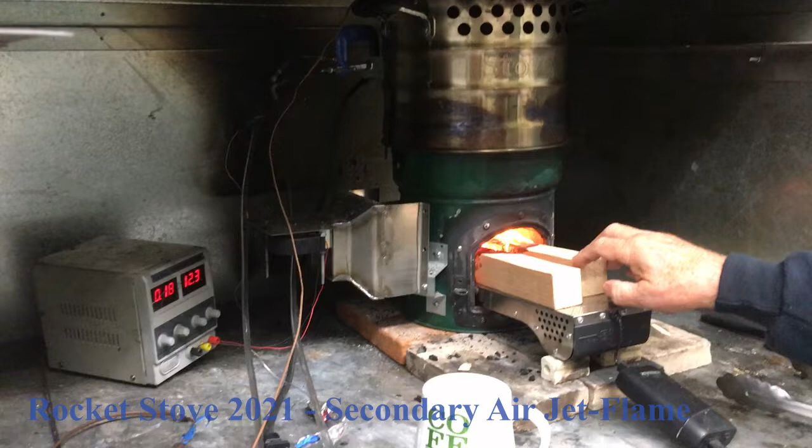We have the jet flame and we're pushing in sticks of Douglas fir very carefully, and we have a secondary air setup on the left. It's a stainless steel box made by Global Health Labs, a subsidiary of the Gates Foundation. We are controlling the fan speed of that secondary air, you can see the 12.3 volts, that's how we control it. Right now with the jet flame, we control the fan speed and we're holding that constant at 5 volts out of that USB.

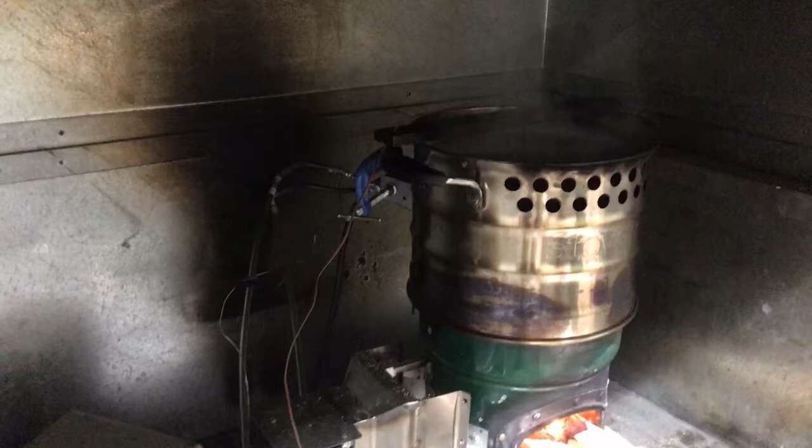Something you've never seen here at Aprovecho: we have the super pot fitted with an oxygen sensor, which is this black connector, and also fitted with a sensor to measure the velocity of the exhaust gases, those clear tubes. Then there's a temperature sensor inside that skirt in the back, they're all in the back. That helps measure velocity, but it also just gives us temperature. As usual, we have temperature in the pot.

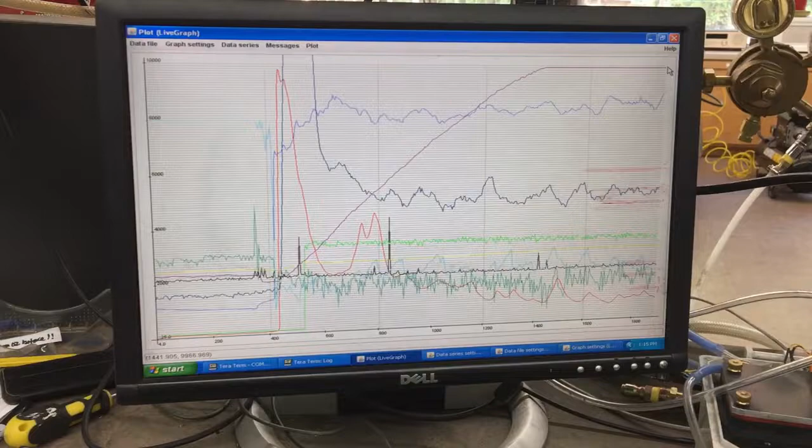Now we can go over and see the output from the LEMS. We've got a lot of lines happening right now. On the bottom we have a red line, that's the CO. Then we have this dark green line, that's an indication of velocity, it's inverse right now so lower is higher velocity. Then we have this light blue line, that's the oxygen in the skirt, going up and down each time we push a stick in and things happen. Then we have the black line, which is particulate matter, using our old LiveGraph program, and we have the sensitivity up very high so we can see if there are any problems with this stove.

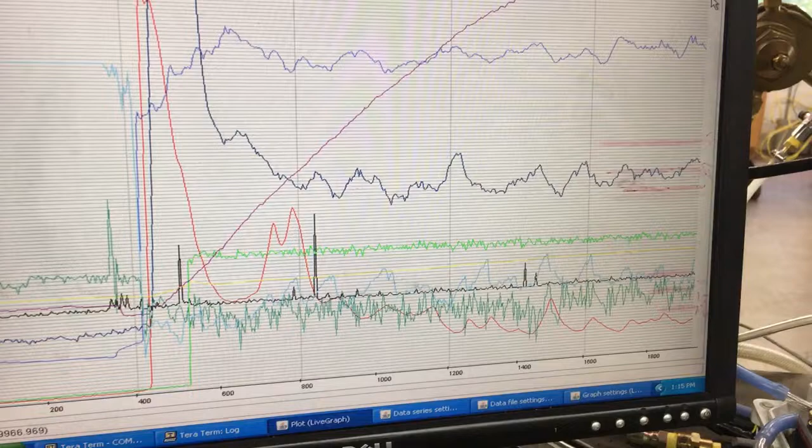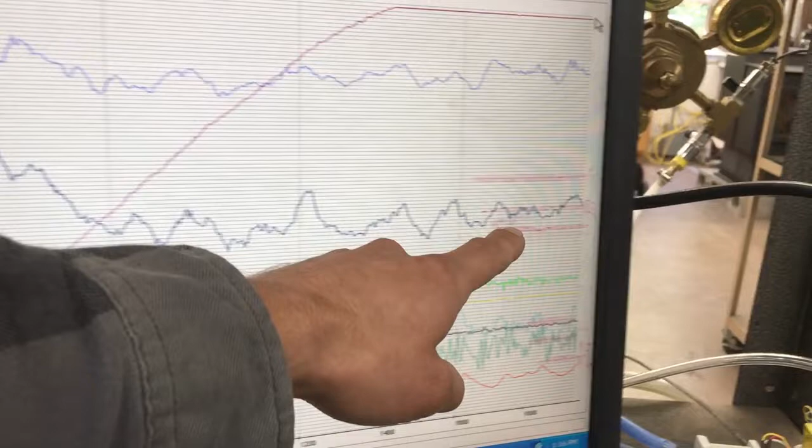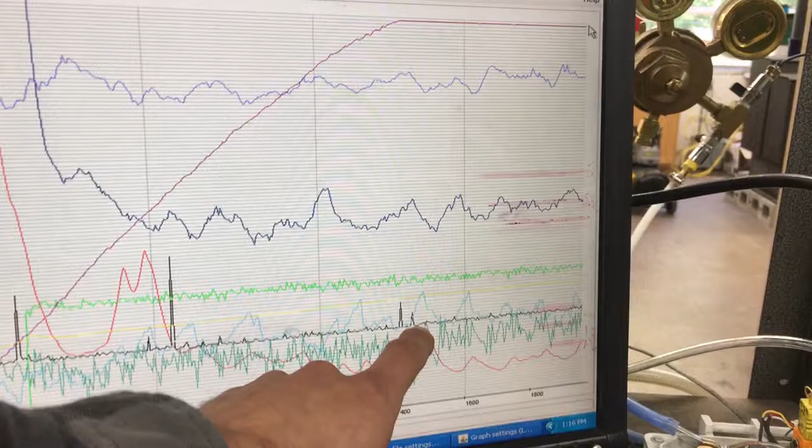This is really nice: then we have the CO2, which is a proxy for firepower. We've taken a China marker and drawn right on this old screen, and we're trying to keep the CO2 within those lines, because we know firepower and CO2 heavily influence the particulate matter. So we're trying really hard to control that independent variable, our main independent variable in this test series. Then we have the temperature in the skirt and the water temperature.

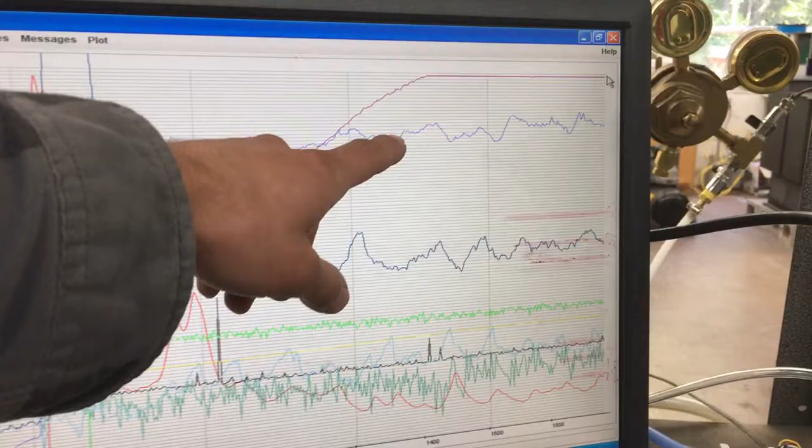One other thing about the secondary air: it's coming in from the back of the stove, this tube coming in at a 90-degree angle. Throughout this test series, we can vary the pressure into the jet flame, the amount of air going up through the bottom of the stove, and we can vary the pressure of that secondary air. We can also change the temperature of the secondary air, we have some ideas about how to do that.

Remember, Sam, you did 10 tests first to determine the baseline, just with the jet flame. Then you added the secondary air, and we're going to do a lot of repetitions to see if that change is beneficial or not. So this just shows how very quickly in a week you can get some cool data about what's going on in the stove.